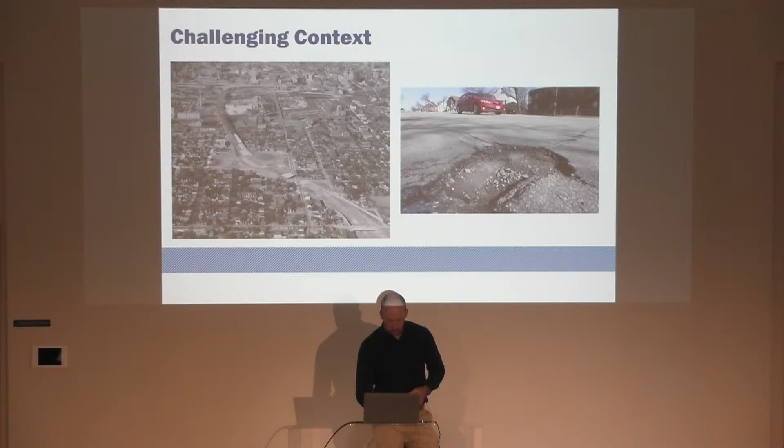So we're trying to do these, and I'm going to switch gears a little bit to talk about safety, but the challenge of just not having well-maintained infrastructure overarches all of this.

So when we're working on the safety challenge in the city, this has been a long-running conversation. The city started to see fatalities, so deaths and life-changing injuries where someone is maimed or paralyzed in a crash, started to increase around 2014, 2015. Before that point, they'd been following the national trend of going down. Something broke around 2014, 2015.

It's the phones in all of our pockets, that's my opinion. But then the pandemic really accelerated it, partially because the streets were so empty, partially maybe because of the societal challenges we had during that time, and also we had MPD and enforcement challenges within the city. All of that combined, where we went from right around 30 to 35 people dying due to transportation every year in the city to 80 in 2020.

And so that's the context of the political appetite to do something about that. So in the Department of Public Works, we've been working on developing for a while a series of strategies. I just want to talk about what those are.

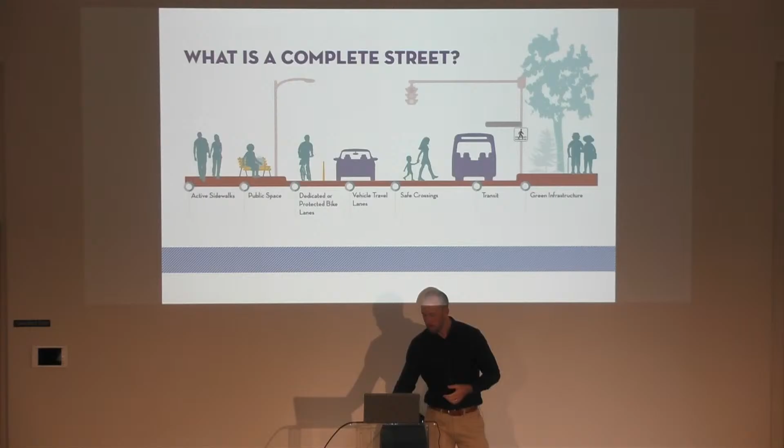So switching gears to Vision Zero. Vision Zero is more of a systemic level approach. There is a transportation design element to it, which is what I'm in charge of, but there's also an enforcement piece and a public education piece to it.

Vision Zero has some key tenets. One is, in the name, death and serious injury due to transportation are unacceptable. We need to figure out how to pull that out of our system. Humans make mistakes, and you need to design your system in a resilient way so that those mistakes don't kill someone else.

Humans are vulnerable as well. We are very squishy compared to the very large objects we drive around that are steel and very hard. The people in particular who are outside the vehicles, but even people in the vehicles, can be harmed by those vehicles.

Responsibility is shared, and this is kind of a counterpoint to our historical approach to accidents and crashes, which has been that the driver made a mistake and just needs to do a better job. Some of that is true, but the idea here is that the people who design the roads, like me, also bear responsibility for making sure that we're giving drivers the right cues, encouraging them to drive the appropriate speed for the context, and bringing design features in to make sure we're understanding that humans make mistakes.

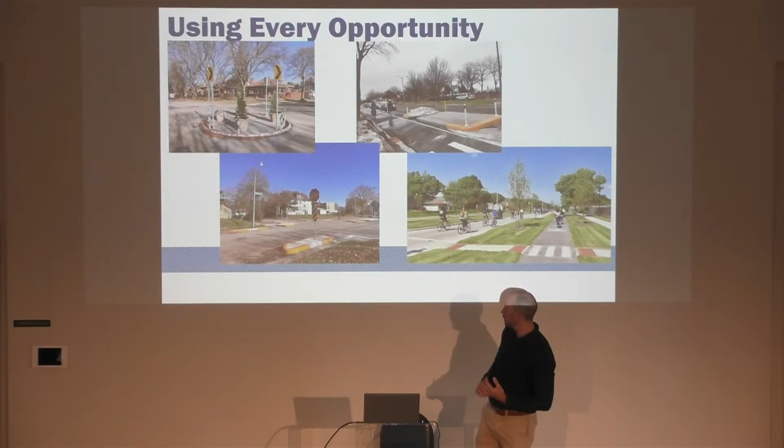That program is how many of the speed humps, almost all the speed humps across the city, have been installed. We have more than 1,200 speed humps, and they're almost always installed that way. Most of the traffic calming on a residential street, especially if it's not next to a school, was initiated by resident petitions. That's how we do a lot of traffic calming in the residential parts of the city. The bottom left is some pieces of concrete poured on top of the road—that's Oakland and Newberry Boulevard next to Riverside Park. This is an example of something you could do with the community-led traffic calming program, but this project was actually a DPW-initiated project.

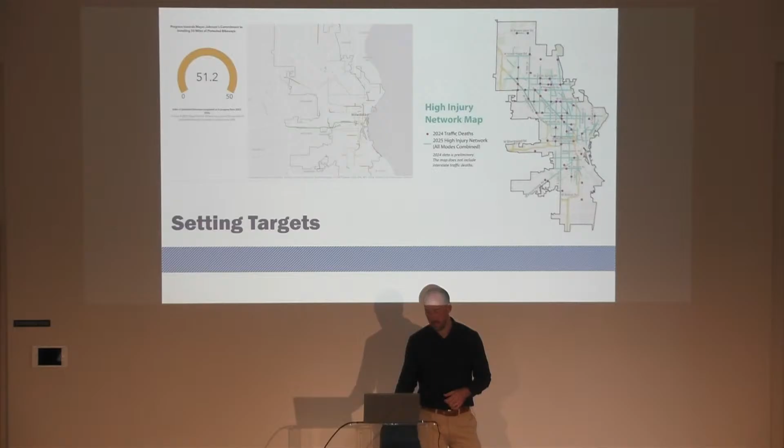This is an independent safety project, not a paving project. We identified this area by looking at our high injury network to make targeted safety improvements. The high injury network is where more than 60% of fatalities and life-changing injuries occur, yet it's less than 10% of our mileage. A large amount of that, about 40%, is state highways, and another 10% is county, so about half we directly control. But we try to target our high injury network with improvements when they come from the department rather than the community.

Top right is a normal mill and overlay asphalt resurfacing project, where we remove the top 2 to 3 inches of asphalt and put down 2 to 3 inches of new asphalt. This is Highland Boulevard next to Harley-Davidson and Molson Coors.

What we did here, and what we're doing now, is anytime a street is ready for that type of investment, we look at our high injury network data, crash data, and traffic volumes to determine if there's something different we can do. Highland Boulevard used to be 2 lanes in each direction plus a striped bike lane plus a parking lane, meaning 36 feet wide curb to curb, then a median, then 36 feet on the other side—basically a double-sized street. We looked at traffic volumes and determined we could reduce a driving lane in each direction without causing too much congestion.

We reallocated that space to bikes, but more importantly, shortened the crossing distances, because the crashes we were seeing were people going really fast down Highland, whipping around the corner as it turns toward Washington Park, and hitting or nearly hitting pedestrians crossing the street. Molson Coors, Harley, and the neighborhood residents were all very interested in seeing us slow the street down, and this is how we did it. It was pretty successful—I've got some data later to share.

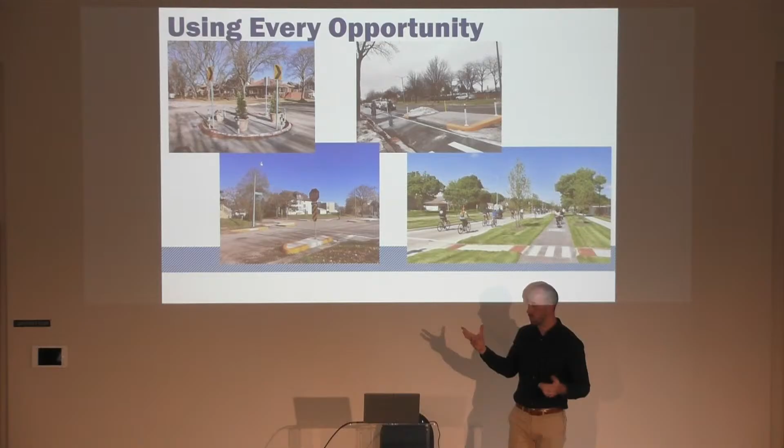We shrunk the curbs way in, added an extra row of trees, and put a bike path next to the sidewalk behind the curb. There was very little on-street parking, so we removed a lot of it and narrowed the street down—in some cases the curb to curb is only 14 feet with one lane of traffic and no parking. This is kind of a shining example of the future vision for the city, and the first street started and completed since the Complete Streets policy was adopted in 2018.

Taking you through a couple more examples: Galena Street in Washington Park, east of the park. This is a safe speeds retrofit with a paving project in a residential neighborhood on a local street. Unusually for a residential street, it experienced regular high speeds because it connects 40th Street, at the eastern edge of the park, to 35th and then east to 27th. People were using Galena as a cut-through rather than Lisbon, Walnut, or Vliet to the north and south, and residents were really sick of it, so they approached us saying let's do something different here.

It was time for repaving, so we looked at different approaches. Before, this is what Galena looked like—a wide but fairly standard residential street in the city. Washington Park and the Senior Center are to your left, and Bethune Academy, a school, is to your right.

And you could go in a straight line if you were a driver. You could go as fast as you'd like and you probably wouldn't run into anything, unless you lost control of your vehicle.

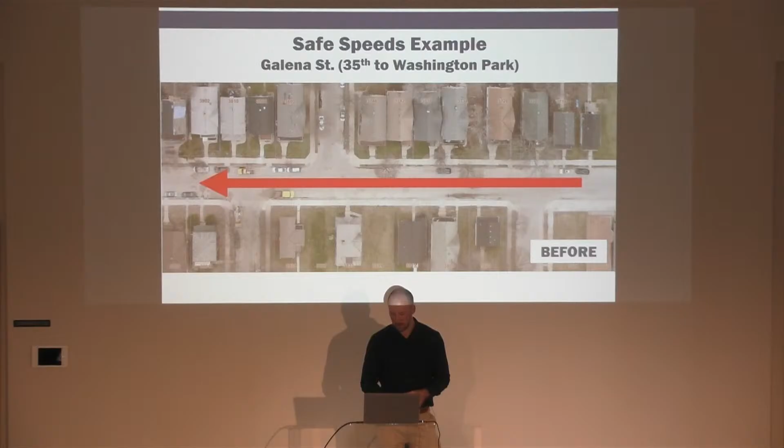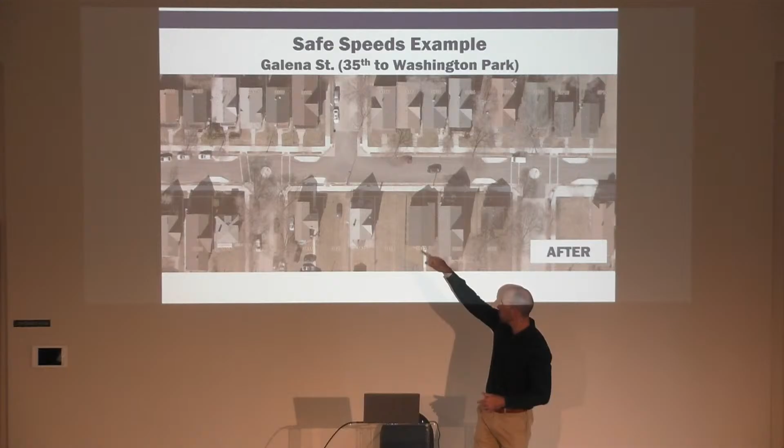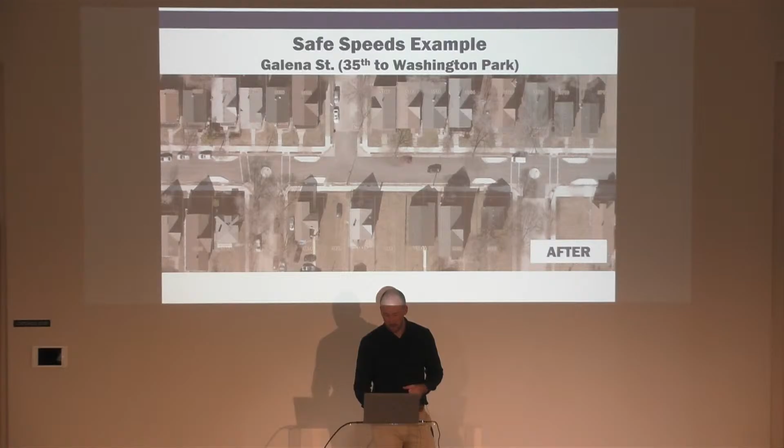After this project and working with the neighborhood, we poured concrete. We call them pinned-on bump outs, or curb extensions, added on either side of the curb, and traffic circles in concrete in the middle. These have since been painted by students of Bethune Academy, so they look a little less boring and ugly now. The idea is that at intersections where people are crossing, where kids might be going to and from school, we want drivers to think about what they're doing, slow down, and navigate around these pieces of concrete. The need to make that maneuver, shown in green, slows people down and encourages safer driving speeds.

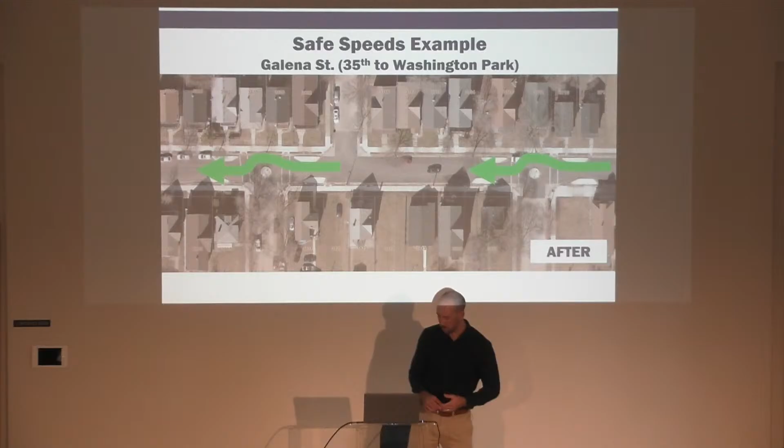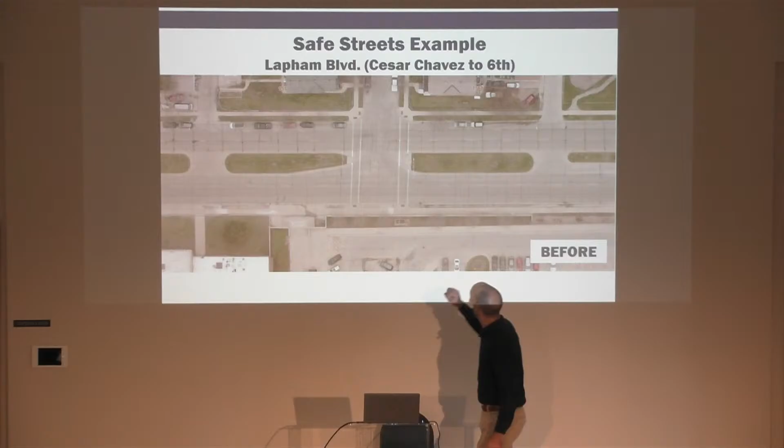Another example is Lapham Boulevard on the south side. This was similar to Highland: two lanes in each direction. There's a city park right there, and that's the path into the park. This is the parking lot for South Division High School, one of the biggest high schools in the city. It's a very busy, dense neighborhood, with a lot of activity and a lot of homes. This is actually one of the densest census tracts in the state of Wisconsin, with a lot of people walking, driving, and busing to South Division since it's such a large school.

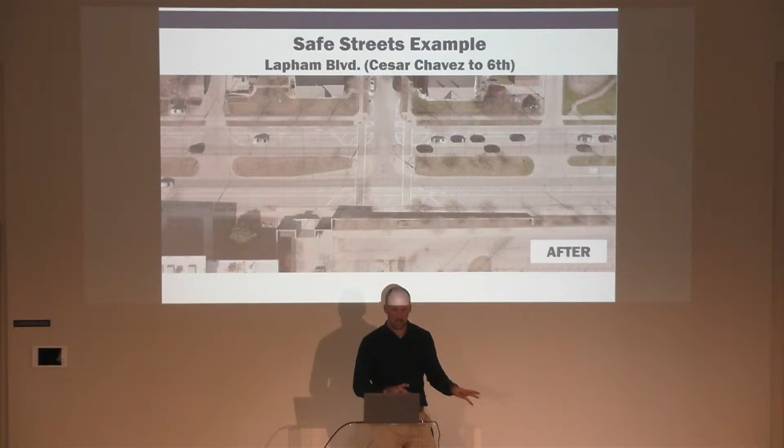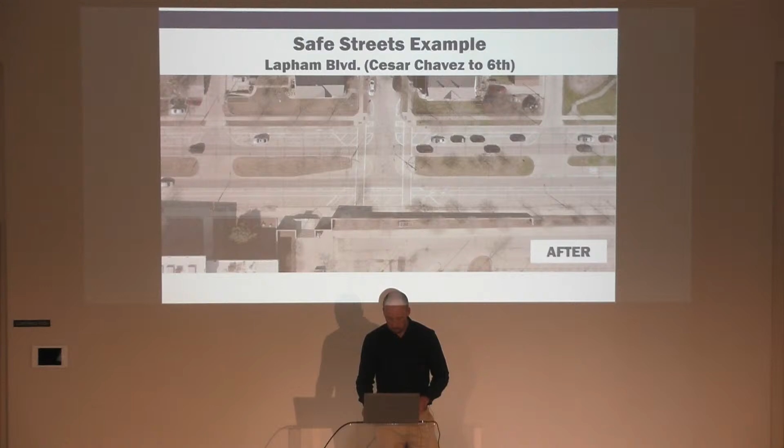Before this project, in 2022, it was two lanes in a straight line with a fair amount of speeding. We retrofitted the street separately from a paving project by putting in floating parking, so parking is now away from the curb using paint and those shorter plastic posts you might be familiar with. So we went from two lanes to one lane in each direction, and it really improved the speeding issue on the street.

There was a 70% decrease in people speeding at all, and an elimination almost entirely of people going more than 10 miles over the speed limit. The median speed actually dropped below the speed limit, which is very atypical in the city of Milwaukee. So that was a very successful project.

We're also now iterating, as I mentioned. Next year we're going back to repave Lapham Boulevard, and we're using what we learned to modify it. There will be some concrete curb extensions, and we're putting in bioswales, so there'll be some green infrastructure and aesthetic improvements for the neighborhood, as well as new pavement and some other safety improvements.

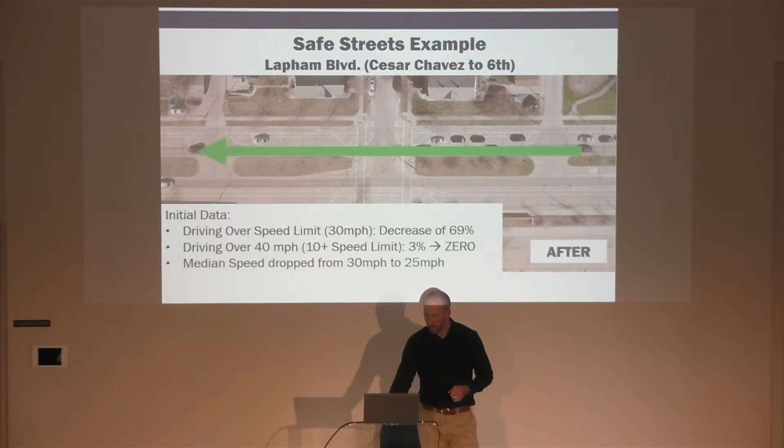I think I'll skip over Walnut here. Yeah, we'll just go straight to this.

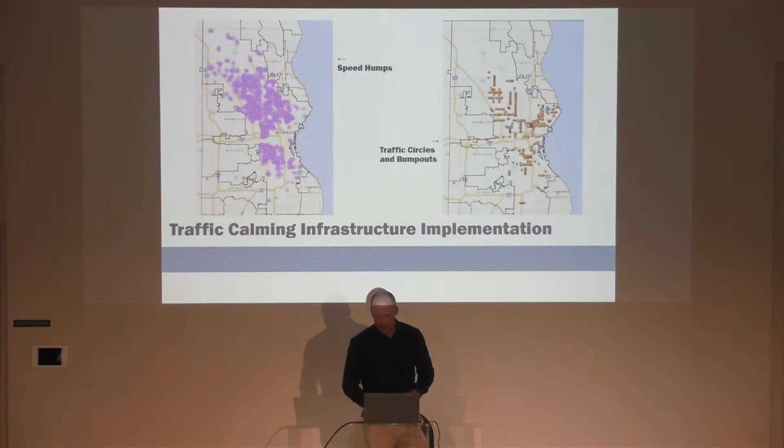So we do collect data on this because we want to know if what we're doing is effective or not. Our goal as engineers and planners is to get to the point where we have enough data to know what types of interventions are most effective in what contexts.

The basic thing we're trying to do from an engineering perspective is get people to slow down. You either need to do something horizontal, horizontal deflection, making people go right or left or shrinking their feeling of how much space they have, or you need vertical deflection, making the car go up and down. Those are really our options when you're using physical infrastructure to influence speeds.

We want to understand among those options what's working best where. On Highland Boulevard, we saw a 76% decrease in people driving more than 40 miles an hour.

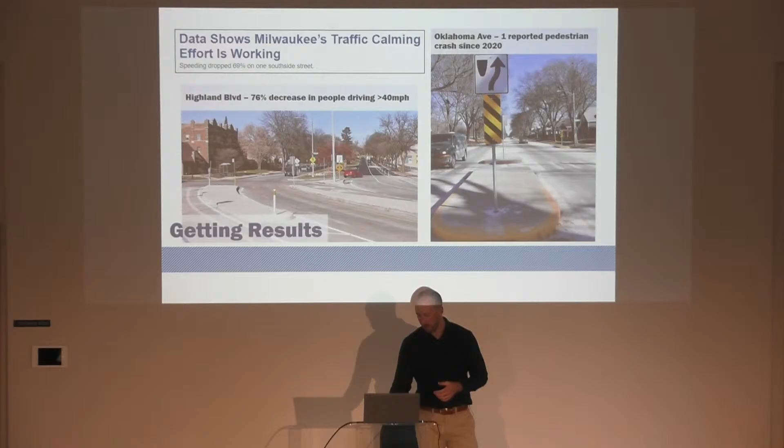Oklahoma Avenue near Humboldt Park used to be a raceway. There's actually a famous video of somebody dodging around a yellow bus and then slamming into the back of a parked car because they were trying to pass a school bus on the right. You can't do that anymore because now there's concrete in the way. So we've seen a significant decrease in crashes on Oklahoma Avenue since this was implemented.

I won't read all of this, partially because it got cut off, but this is the sort of data collection we're doing. We collect speed data, before and after, because that's an easy proxy for us to figure out if we're making the roads safer.

We're also collecting crash data, but you need to give yourself 3 to 5 years after the road change to really see statistically if it improved crashes. There's a randomness to crashes - there are all sorts of things I can't control as an engineer. In fact, we did have a crash on that Oklahoma Avenue improvement after we made it, and there was a fatality.

It was a driver who turned the wrong way. He was confused about where he was. It was at night, an older gentleman. He was blinded by the headlights of an oncoming car, lost control, and ran into a tree. He passed away in that crash. Not that there's no engineering solution to that, but that's not necessarily the problem we were designing for. That's the challenge with just using crashes as a measure.

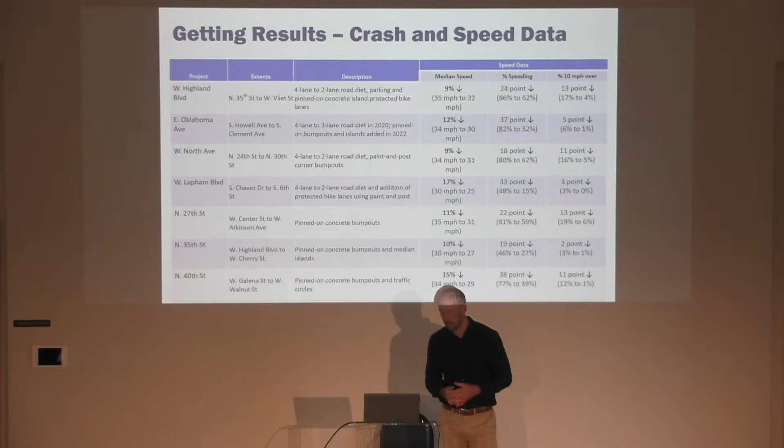So we use speed as a proxy for this, and we've seen somewhere between good, pretty successful, to really successful results on every corridor we've tried to make changes on. So we're pretty happy about that.

The other thing we're working on is trying to find more resources. We were very aggressive during the Biden administration - all these headlines are from that era about figuring out ways to identify more funds.

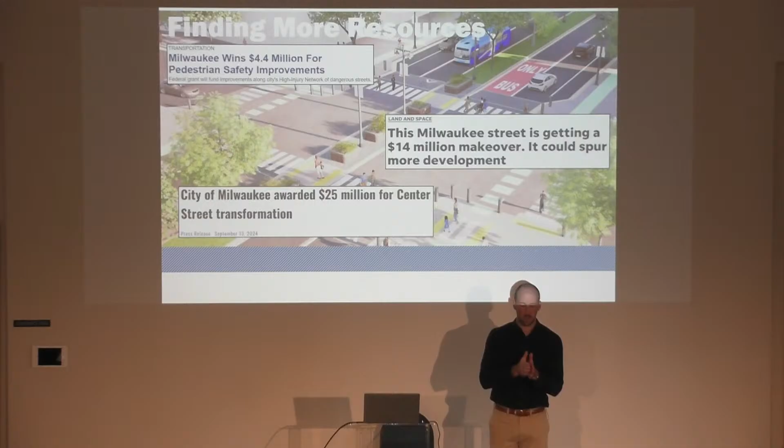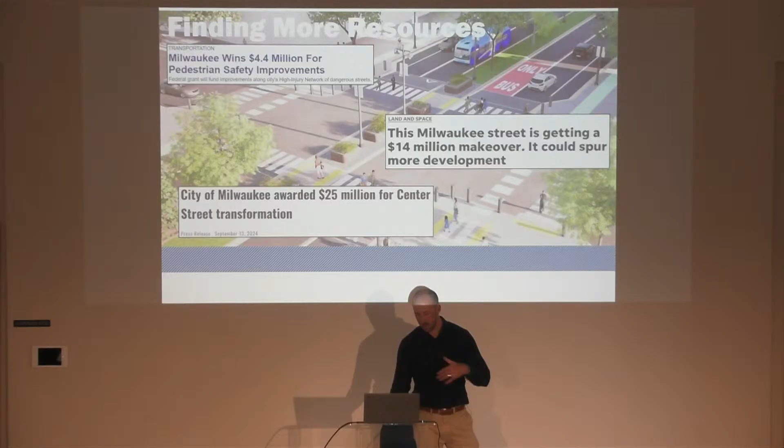Another tool we have in the city that we're leveraging much more than before the Johnson administration is tax increment financing. The state statute that enables TID districts allows that as the increment on the original project is paid off, you extend the TID for a year and use that additional revenue for public infrastructure improvements within a half mile of the original district. So basically everything happening downtown is being paid for by a TID - we're not using city property tax levy dollars for that. We're trying to do it in the neighborhoods around downtown as well.

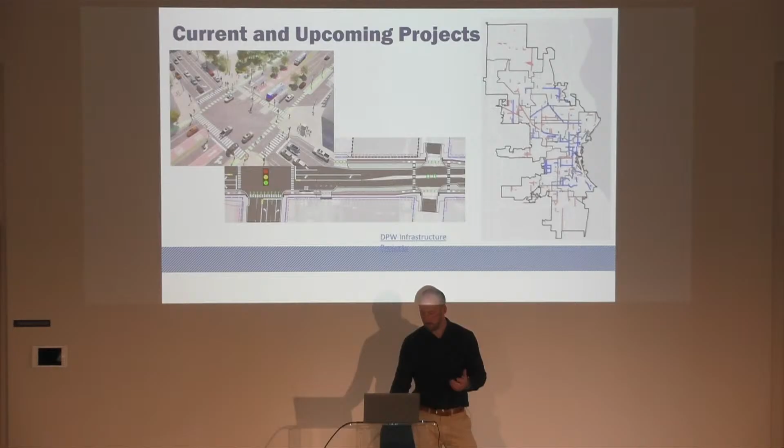We have a lot of ongoing and upcoming projects. If there are questions about those I can answer them, but National Avenue, Prospect Farwell is coming 5 or 6 years from now. National Avenue starts next year. Sherman Boulevard between North and Capitol is going to be reconstructed in 2028 and 2029. There are literally hundreds of projects, and those are just some of the big ones. I'm happy to talk about that more if you'd like.

That's what I've got.

Who has the first question? All right. Okay, I have a question. I currently live in South Milwaukee, so... Maybe it's not on.